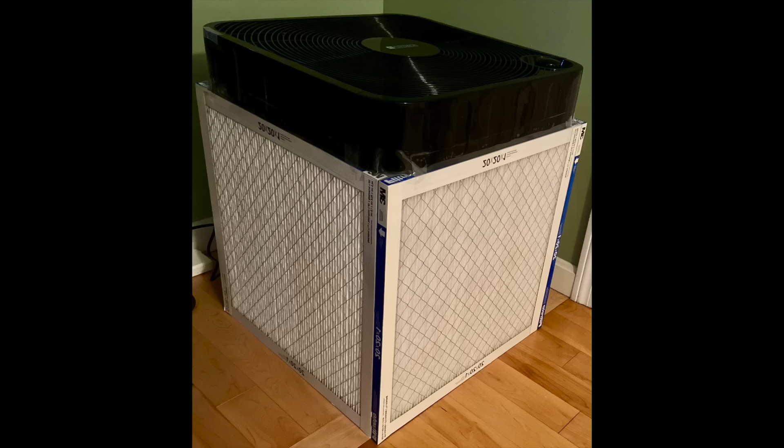First, I'll tell you a story about why I started getting skeptical about the efficacy of most HEPA air purifiers in the first place. One day, an indoor environmental professional, or IEP, came to my house to do a radon test. In my house, there were a couple DIY air purifiers I had built, which were inspired by the Corsi-Rosenthal box, or CR box, design by Jim Rosenthal and Richard Corsi.

CR boxes are typically built from 4 MERV-13 HVAC filters attached to a box fan that sucks air through the filters. The IEP saw one of my CR boxes and said, 'Those are pretty good at capturing larger particles, but they're pretty bad at capturing tiny particles. HEPA air purifiers are way better at capturing tiny particles. You should use a HEPA.'

Let me quickly explain about particle sizes. There are basically a few categories of them. There's PM10, which are 10 microns or fewer in diameter, including larger particles like dust, pollen, etc., and everything smaller. Another category is PM2.5, or fine particulate, which are 2.5 microns or fewer, including some combustion particles, metals, etc., and everything smaller.

PM2.5 is considered dangerous for us health-wise because it can get into our bloodstreams and accumulate in organs, which can cause illness. There is extensive evidence about the health impacts of particulate matter.

Let's talk about one of the many studies. This is epidemiology data from the Harvard 6 Cities study. They measured fine particle concentration in a bunch of different cities and relative mortality rate. As you can see, as fine particle concentration goes up, relative mortality rate goes up as well.

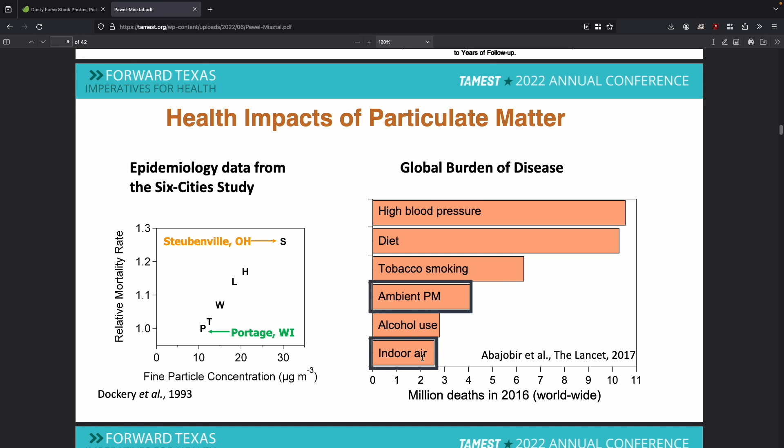In another study published in The Lancet, you can see that poor indoor air quality and ambient particulate matter are among the leading causes of death. This is 2.7 million deaths caused from poor indoor air quality.

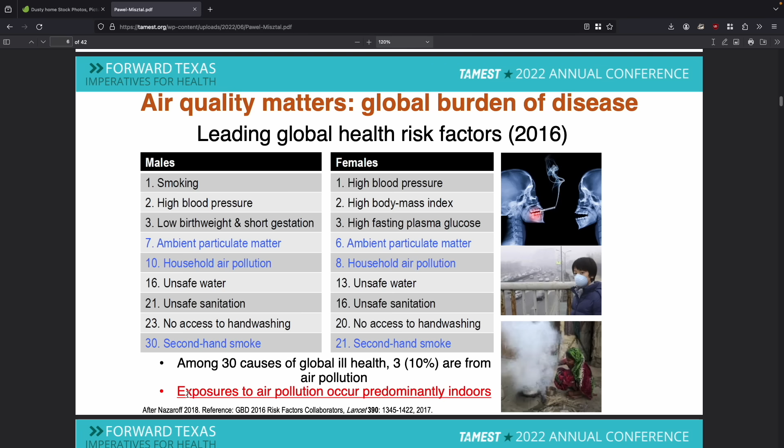Here's another study about the causes of global ill health. You can see that in the top 10 are ambient particulate matter and household air pollution for men and women. And we need to note that exposures to air pollution occur predominantly indoors because we spend 90% of our time indoors. So it's for this reason that my IEP said to get a HEPA air purifier.

I ended up buying 3 units from a brand that was recommended by a few mold inspectors that I follow and trust. I won't say which brand, but it promised incredible efficiency, better than standard HEPA. So I was super excited when my 3 shiny new HEPA units arrived in the mail. I immediately turned them on and shut off my 2 DIY air purifiers.

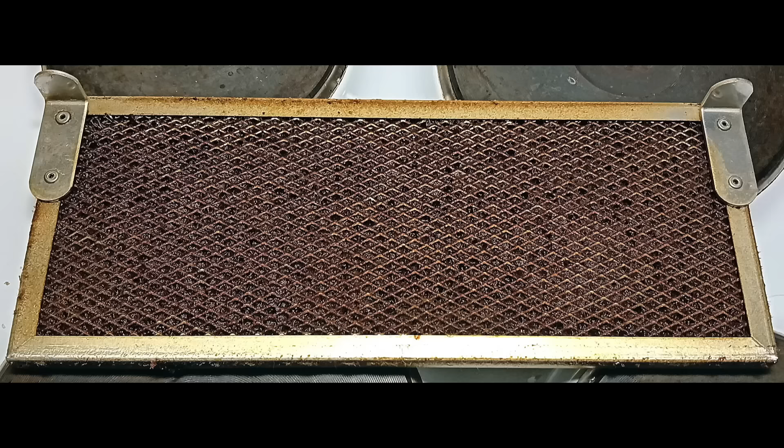Particulate is being continuously introduced into your home's air from various sources, including the outdoors, cooking, mold, our bodies shedding skin cells, us moving around the house and stirring it up, and more. In order to significantly lower the concentration of particulate in your air, the removal rate, or CADR, must be high enough to counteract the generation rate.

Let me put it practically. When your air purifier has a high enough CADR for the space it's in, there's less of a chance that particulate concentration will build to an unhealthy level. If it does, it won't stay there as long—your duration of exposure will be shorter. In determining the performance of an air purifier from an indoor air quality perspective, CADR is the only measurement that matters, because it's a direct reflection of how clean the air will be.

Let's go back to my initial question: how can a HEPA air purifier capture virtually all particles but still leave the air dirty? To answer that, I'll tell you this—extensive research shows that DIY air purifiers, CR boxes basically, using MERV-13 filters tend to achieve much higher CADRs than HEPA air purifiers. To help us understand why, we'll talk to Wayne Westerman and Rob Wissman, co-founders of Clean Air Kits, a company that makes and tests air purifiers that actually work at an affordable price point. Wayne and Rob will introduce the concept of how MERV-13 filters can outperform HEPA in in-room particulate purifiers.

The most important metric is how quickly you're removing the particles from the room. If you look at a MERV-13 filter for viruses, yeah, it's capturing about 75% of the particles per pass. But you've got these two big filters here, you've got an enormous amount of area. If you're building a Corsi-Rosenthal box, it's like four filters—it's an enormous area for that to happen. So the total number of particles you're capturing is going to be really big. Here, this big blue arrow, that's your equivalent of how much air is coming through perfectly clean.

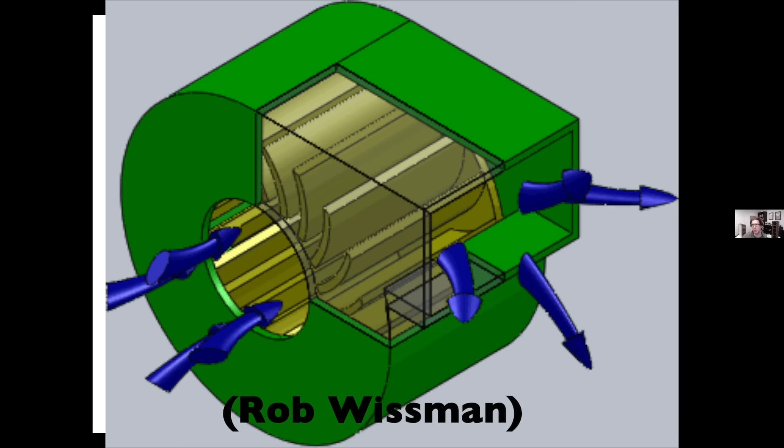Amen. So with HEPA, to get a high CADR, what do you actually need to do? There's two directions they can go. They can put a big honking fan on it that's really powerful and really loud, or they can make a big honking filter, which takes up a lot of room and is going to be really expensive to buy replacements for. That's how they can make it either quieter, or more powerful, or both. And there's some serious trade-offs there in terms of user experience and cost.

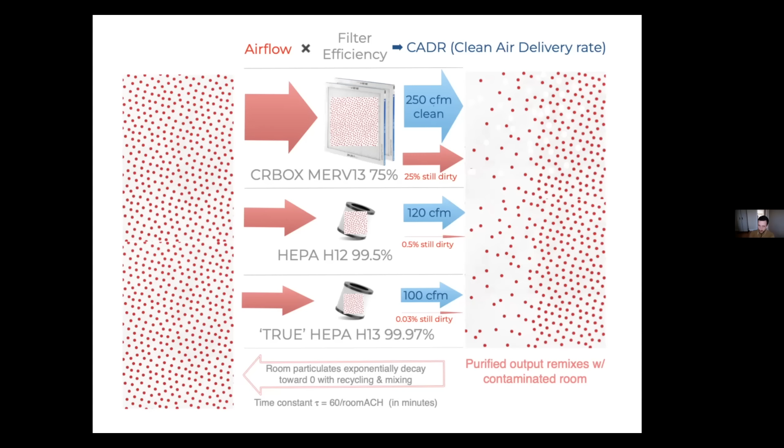Well said. Isn't it true also that many HEPA air purifier brands don't even report CADR in the first place? So when you look at websites for HEPA air cleaners, yes, some of them don't advertise the CADR. And there's probably a reason for that. It's not that they don't know the CADR for that device. So that's just something that consumers should be aware of. I say CADR, Wayne and Rob say CADR.

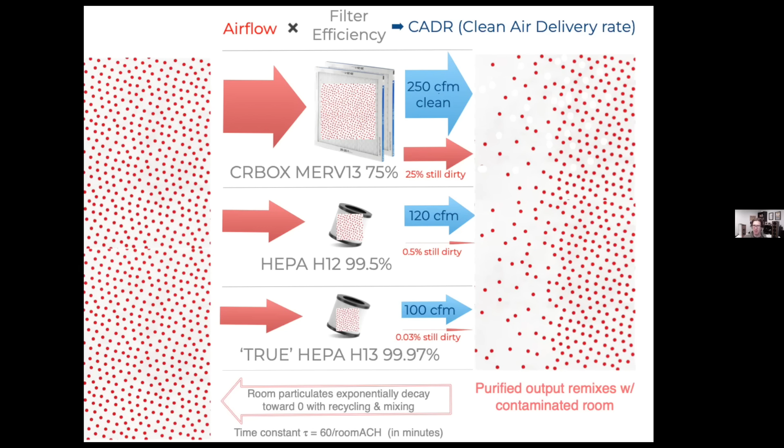We both mean clean air delivery rate. And there are a few HEPA brands that do report CADR. Among those, can we trust that number, or is it a little misleading? A lot of the time, there's a single number reported. And when that's the case, the number is most likely from the highest and loudest setting available on that device, because that gives them the biggest air cleaning number. That's when the fan's moving the fastest.

So what do I do to counteract the influence of deceptive marketing? I go up to my proverbial rooftop and I shout about the research.

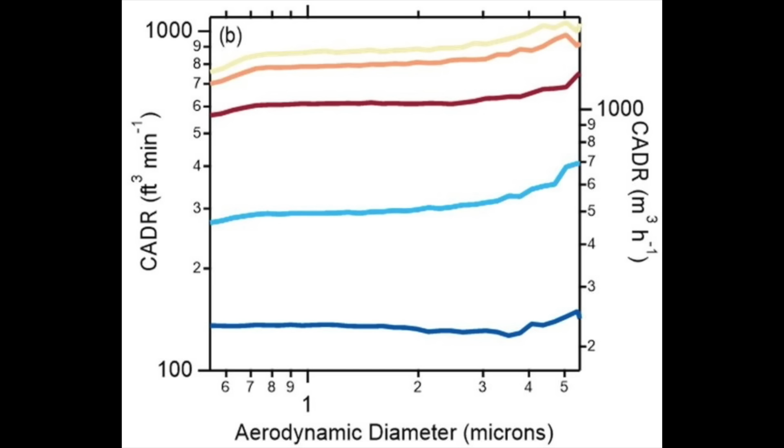Moving on, noise levels of both the CR box and the HEPA were high. That's because the CR box used a box fan. There are quieter fans these researchers could have used—more on that later. Our next study is by Srikrishna et al., who tested a bunch of DIY air purifier configurations against best-in-class HEPA air purifiers. I'm going to focus specifically on their CR box configuration here versus the best HEPA here.

This HEPA on a high speed had a significantly lower CADR than the MERV-13 CR box at its lowest speed. I'm sensing a trend. This was for particles at 0.3 microns, the most penetrating particle size, or MPPS, meaning the size of particle that filters are worst at capturing. So this size is good to use in testing because it tells us the worst case scenario.

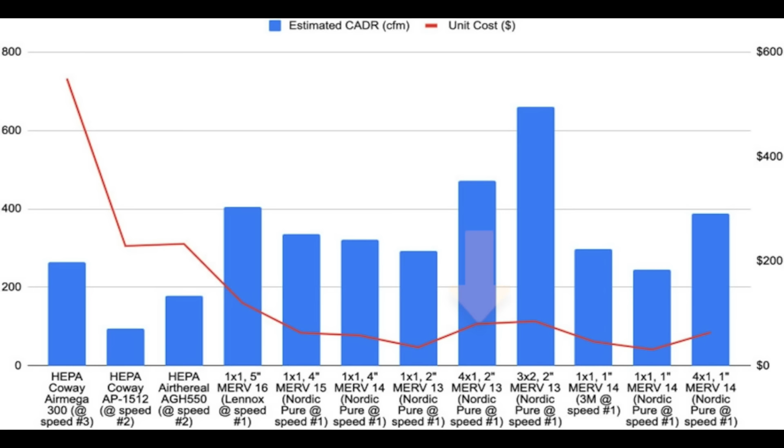The upfront cost of the components of the CR box was around 5 times cheaper than the HEPA. Like this video if you're starting to see why I'm angry.

Before I move on, I want to point out something interesting. The HEPA unit's efficiency actually measured lower than 99.97%, which is the expected efficiency of HEPA. More on that later.

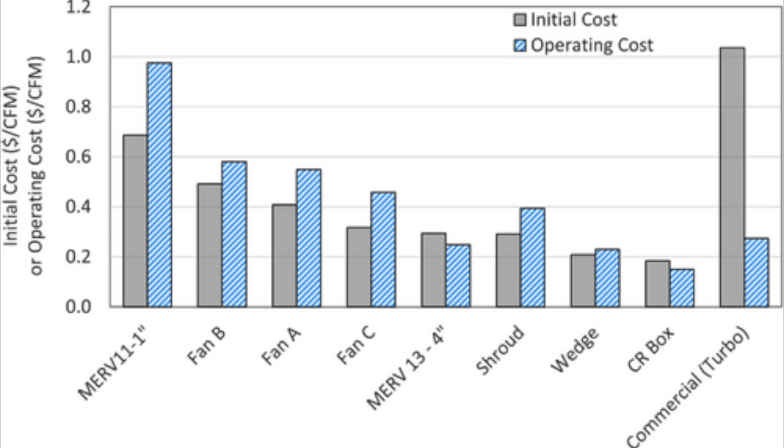This third study by Holder et al. demonstrates that DIY air purifiers can even be effective at capturing wildfire smoke, which mostly measures 0.3 microns. This MERV-13 CR box vastly outperformed a commercial HEPA air purifier in terms of CADR, and also initial cost per CADR and CADR per watt. Interestingly, researchers found that filters saturated with wildfire smoke perform much worse in terms of CADR. So remember to change your filters frequently during wildfire season.

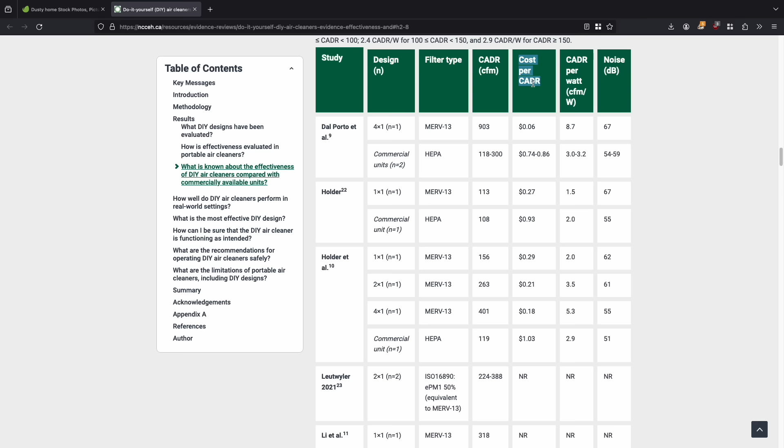Here's an amazing review that compiles a lot of the available data about DIY air purifiers. It's laid out really conveniently so you can see lots of metrics in one place for the studies I just went over and others. Basically, DIY air purifiers consistently beat commercial HEPAs in terms of CADR, cost per CADR, and CADR per watt. So with their great airflow, these DIY CR boxes clean the air faster, cost less upfront, and use less electricity, even though they use MERV-13 filters, which are less efficient than HEPA.

In the studies I just went over, we saw that MERV-13 filters can capture fine particles as small as 0.3 microns. But what about ultrafine particles, which are 0.1 microns or fewer? Let me explain. One argument that people who are brainwashed into touting HEPA air purifiers repeatedly make is that HEPA can capture ultrafine particles while other filters can't.

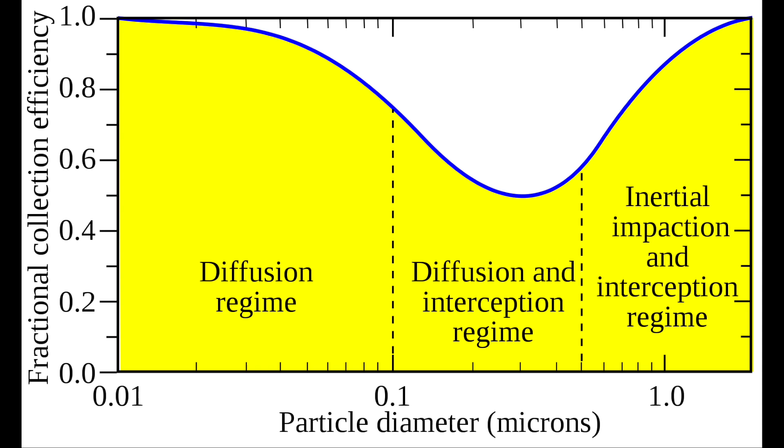It is true that HEPA filters can capture ultrafine particles. In fact, HEPA filters are better at capturing ultrafine particles than they are at capturing slightly larger particles. This goes back to the concept of most penetrating particle size, or MPPS, which is around 0.3 microns. To recap, particles around 0.3 microns are the most difficult for HEPA to capture, and HEPA is better at capturing particles both larger and smaller than 0.3. But the thing they don't tell you is that MERV filters exhibit the same phenomenon.

Figure 5 from Azimi et al. shows the size-resolved removal efficiencies for MERV-rated HVAC filters, so how efficient they are at different particle sizes. On the x-axis, you can see the particle size from 0.001 microns, well into the ultrafine range, to 10 microns, a larger particle. On the y-axis is removal efficiency, so the higher the better. On top, you can see HEPA, which is of course the most efficient of all filters, near 100% no matter the particle size, but being the most efficient at sizes smaller and larger than MPPS, as we went over.

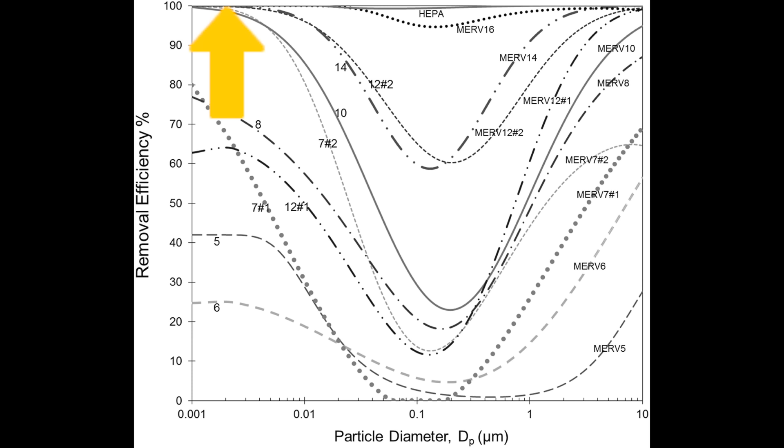But these studies measured single pass efficiency for a standalone HVAC filter. What about in the context of a DIY air purifier with 4 filters?

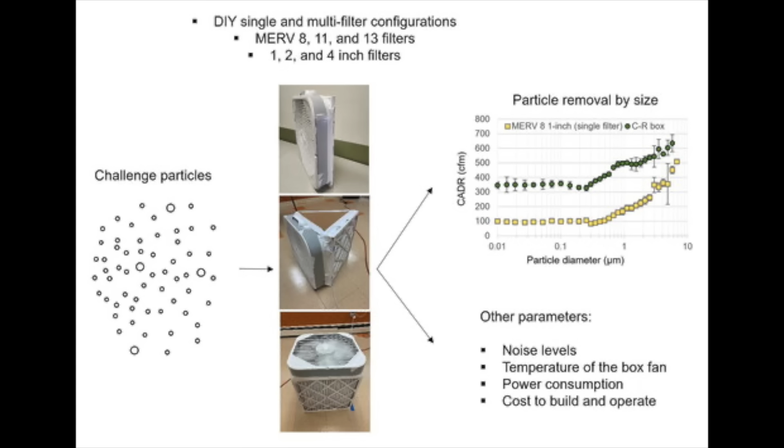Myers et al. demonstrates that CADR of a CR box, in green, is lowest at the MPPS of around 0.3 microns and increases slightly as we get more ultrafine down to 0.01 microns. I'd like to point out that these researchers didn't measure particles as ultrafine as the previous study, and if they had, I'd expect to see CADR increasing more on the left end as particles get more ultrafine. Even so, the data shows that CR boxes can absolutely capture ultrafine particulate, and just like HEPA, they're even better at it.

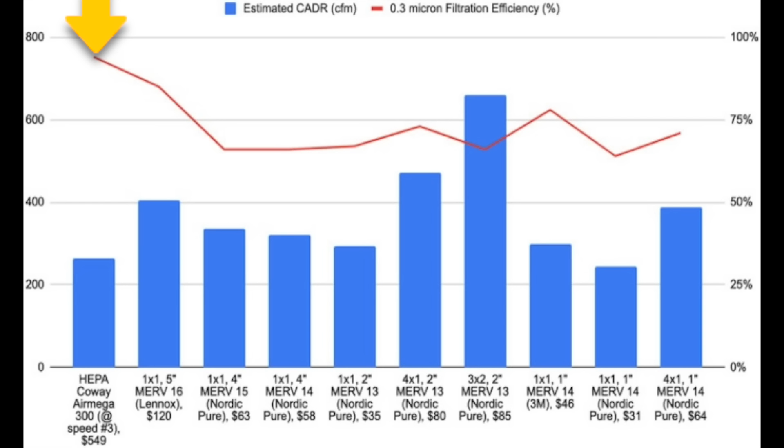Remember earlier when I mentioned that the HEPA air purifier from Srikrishna et al. had an efficiency lower than 99.97%, its expected efficiency? This may be because on turbo speed, the speed used to market their CADRs, most HEPA units are running at a velocity much higher than the velocity used to test their filtration efficiency. In this context, the faster air flows through a filter, aka face velocity, the more particles can penetrate through it without getting captured. We don't want penetration.

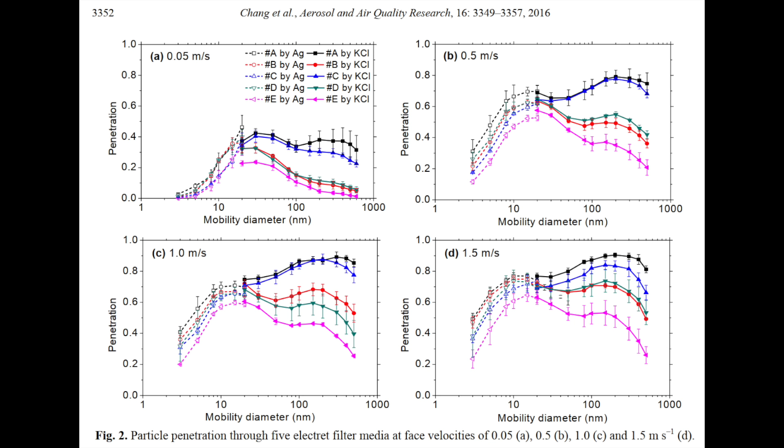This study by Chang et al. shows that penetration decreases as air velocity drops, especially for ultrafine particles, interestingly. So the fact that low velocity lets fewer particles penetrate is good for CR boxes, because generally velocity will be much lower in a CR box than a HEPA unit. This is because CR boxes tend to have a much larger filter surface area. They have 4 filters, that's a lot of area. Also, I especially love this study because it used 3M Filtrete filters, the best HVAC filters right now according to numerous testers, one being the 3D Handyman.

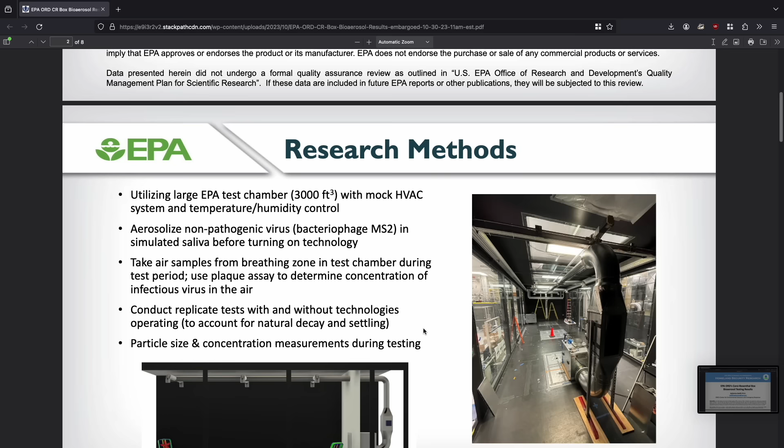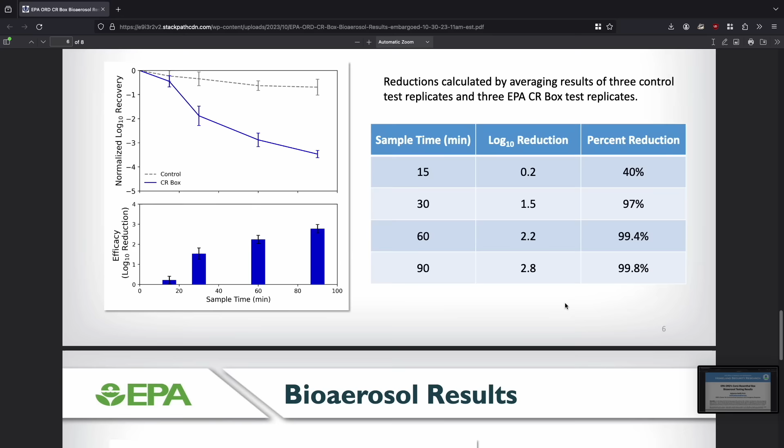So it's pretty clear that CR boxes are amazing. But can they protect us from viruses? This is a presentation by Dr. Katherine Ratliff from the EPA, in which a non-pathogenic virus was aerosolized in simulated saliva in a large 3,000 cubic foot chamber. The results: the MERV-13 CR box drew down 97% of bioaerosols in 30 minutes and 99.4% in 60, far better than control, which was the CR box turned off. CADR was 234 CFM. So yeah, DIY air purifiers can protect us from viruses too.

So now we know that CR boxes leave HEPA air purifiers in the dust in terms of initial cost, energy efficiency, and of course, clean air delivery rate, no matter the particle size. However, both HEPA units and CR boxes can be a bit noisy.

Is there a way we can retain the high CADR of CR boxes but use a quieter fan than a box fan? Remember Wayne and Rob from earlier? They've figured out a way at their company Clean Air Kits. They make a line of air purifiers that are quieter and more energy efficient, even than standard CR boxes, while still retaining some of the design features that make CR boxes so effective in terms of CADR.

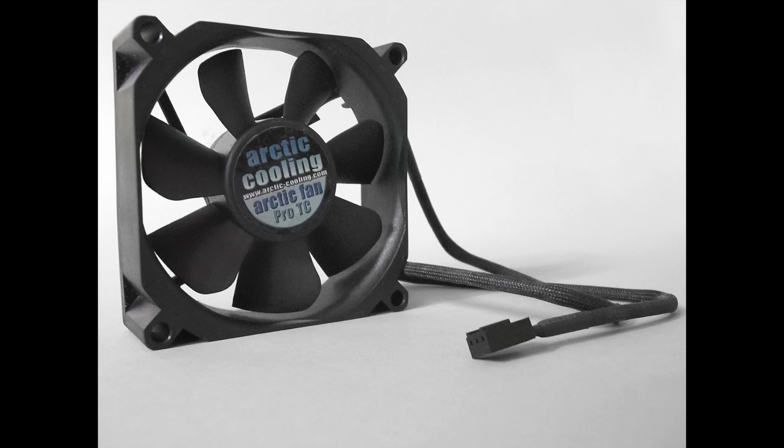The key: PC fans. Can you guys talk about how PC fan CR boxes can save hundreds in electricity and filter replacement costs compared to large HEPAs with equal clean air delivery?

PC fans have been optimized by a very competitive industry for quietness and energy efficiency. And we found that the 120 millimeter size seems to be the most efficient size. Then we went through all the brands to see which was the quietest and most cost effective. On this chart, watts per occupant on this axis and dollars per occupant, we're just kind of off the charts, way more efficient. We're under $20 per occupant. This is assuming continuous operation throughout the year and a filter change every year. And sampling of other HEPAs, it's costing twice as much and often using several times as much power to do the same thing. Amazing. Wow.

So can you talk about your process for selecting the specific PC fans that you ultimately went with? We took even from the dozen leading models of static pressure PC fans, we evaluated all those in terms of noise and the prices they were available at. And we settled on the Cooler Master brand for most of our products. They have these Sickle Flow and Mobius fans, and they are just a couple decibels quieter than their competition at these operating points. And they're really well built too, robust, and they are UL registered. So that allowed us to pursue UL 507 certification, and that's going to help us get into classrooms and commercial settings.

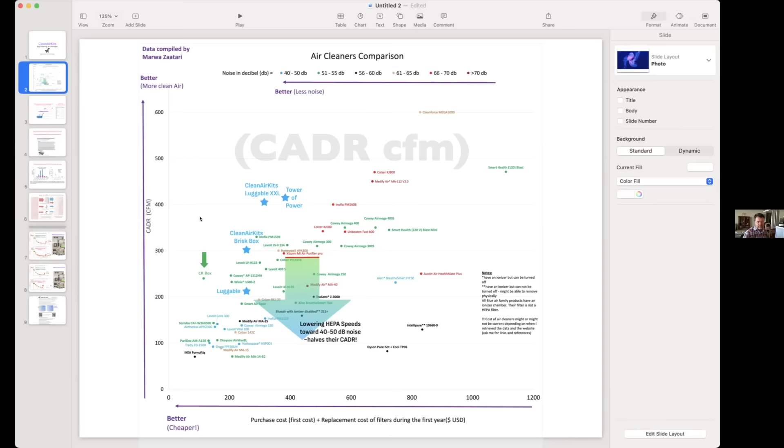This is a sample CR box. They can be anywhere from 250 to 400 CFM by some measurements on their low and medium speed. If you turn the box fan up to high, it would be up here at 600 or 800 CFM. Really, really good, except on high, they're really, really loud too.

This chart was originally put together early in the pandemic, like 2021, and it's got all these HEPA brands. You want to be up in this corner as far as you can on the chart, because you're getting high CADR and low cost. You can see we're kind of leading the march toward that corner compared to all the HEPAs.

The remarkable thing is we're doing it while being quieter than all of them. If you took all these HEPAs in red and green and turned down their speed till they were in the blue range of 40, 50 decibels, then measured them, they're going to drop in half in their CADR performance. They're all going to be clustered way down here.

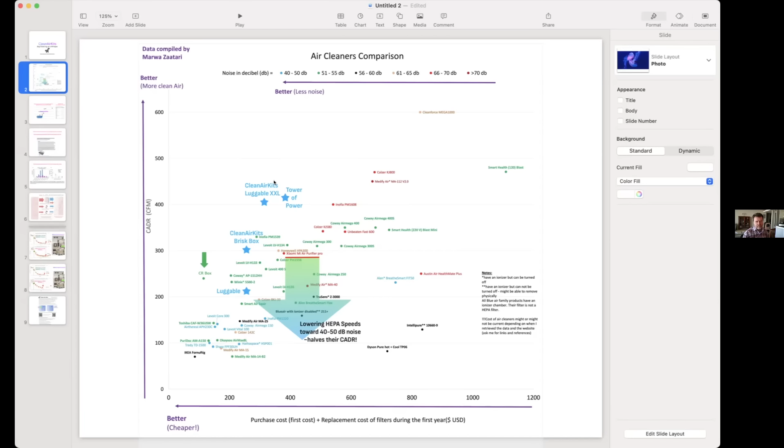In short, we can match the CADR of a CR box on low-medium with our range of models using 5 to 9 or 10 PC fans. We're going to use like 1/5 the energy of the CR box, and we're going to be at least 10 decibels quieter.

One convenient feature about Clean Air Kits that I wanted to mention is that when the power goes off and then goes back on again, Clean Air Kits are so simple that they'll automatically turn back on when the power goes back on. Next, Wayne from Clean Air Kits is going to talk about a deeply informative experiment where he compared the Luggable XXL from Clean Air Kits to a HEPA unit for viral-sized particles.

This was a well-rated, well-regarded, popular commercial HEPA unit. Both the Luggable XXL and the HEPA unit have CADRs of 400 CFM, so they have the same CADR. So how do other aspects of their performance compare?

Wayne: They're both doing what they said. They're doing 400 CADR. They're bringing the particles down. Overall, it's the same. But the PC fans are doing this with about 46, 47 decibels of noise through their MERV-13 filters and using 15 watts of electricity.

The HEPAs on turbo, 64 decibels, almost 20 decibels louder. On turbo, it sounds like a little mini jet engine next to you. And 49 watts, 3 times as much power to do this.

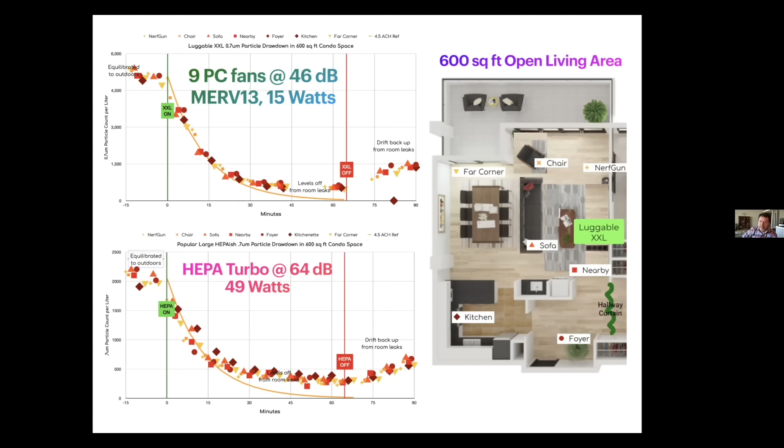So this is a practical example. Our rule of thumb is if you're buying a HEPA and it has a CADR rating, chances are in practice you're going to get half the CADR out of that by the time you turn it down to medium, where it's below 50 decibels and tolerable.

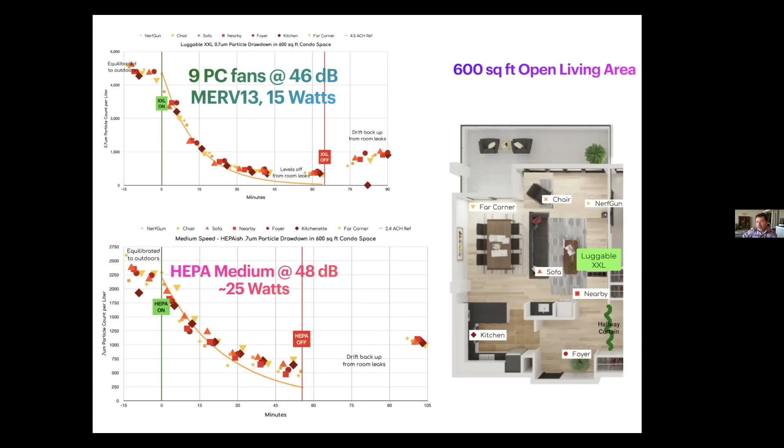So we show that in this chart. We turned that HEPA down to half, and its rate of drawdown fell in half. Instead of getting 4.5 ACH, it was now getting only 2.4 ACH. So to get it back up to 400 CADR or CFM, you have to buy 2 of them and run them on medium.

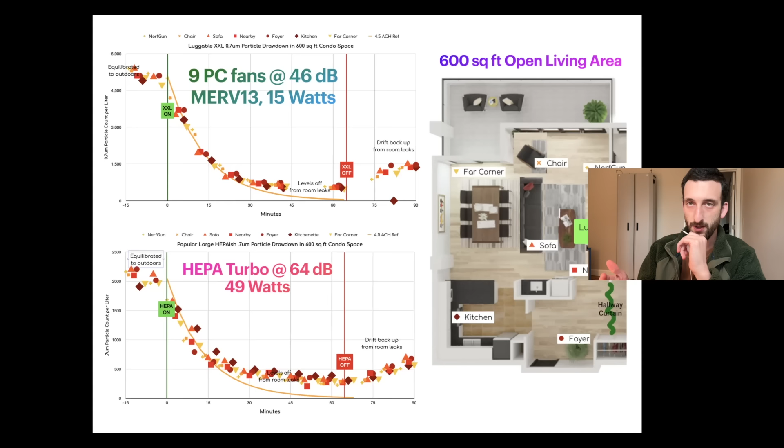I'm going to point out an unexpected finding here. The Luggable's drawdown was much cleaner than the HEPA unit's, indicating that the Luggable, with its PC fans facing different directions, more effectively dispersed clean air throughout the space.

So that leads us to the ultimate question: which air purifier should you get? Well, you have 3 options. Option 1, you can buy from Clean Air Kits.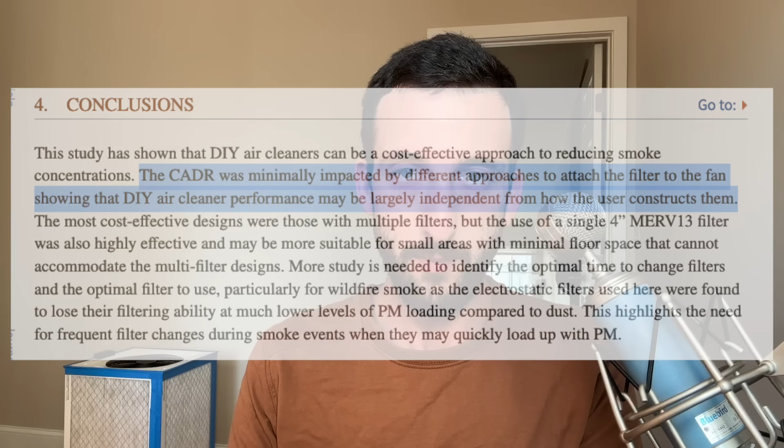Still, I don't want to be a hypocrite. I do plan on testing its CADR at some point, and until I do, take my words with a grain of salt, or should I say, a grain of particulate.

Before you get an air purifier, please keep this in mind. Make sure its CADR is high enough for the particular space you'll be putting it in. There are a few ways to do this, but the easiest and quickest is AHAM's 2/3 rule, which states that the CADR of your air cleaner should be equal to at least 2/3 of the room's area. For example, a room with dimensions of 12 feet by 15 feet has an area of 180 square feet, 12 times 15. So use an air cleaner with a CADR of at least 120 CFM, that's 180 times 0.66, or 2/3. For wildfire smoke though, CADR should be equal to the size of the room in square feet, so 180 CFM in this case.

Another great sizing method is ASHRAE 241 if you're concerned about infectious aerosols. In the interest of conciseness, I won't go over that in this video.

Now I'm going to give my opinion on sizing for homes. I actually prefer CADR to be closer to twice the room area because I'm environmentally sensitive. You can use multiple air purifiers to achieve this. For example, in my open kitchen/living room space, which is around 500 square feet, I have 3 Brisk boxes from Clean Air Kits, each with a CADR of 300 CFM. So 300 times 3 equals a total of 900 CFM. 900 is almost twice the room area of 500. That's what you want to shoot for.

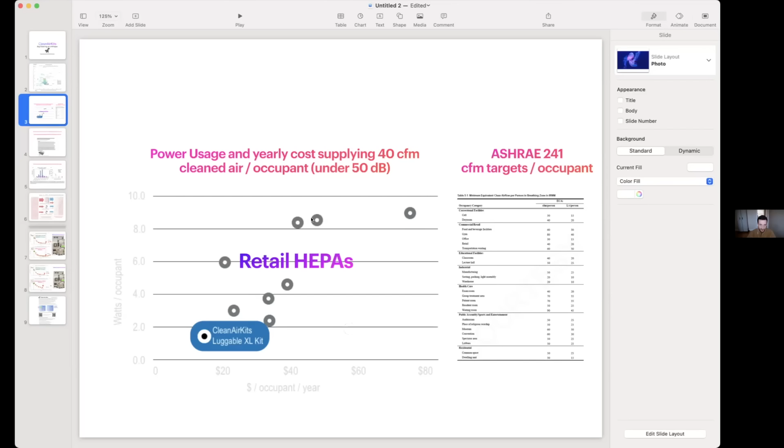So you guys have an air cleaner called the EXHALARON that does something especially unique that I don't think most people are even aware air purifiers can do. Can you talk about it?

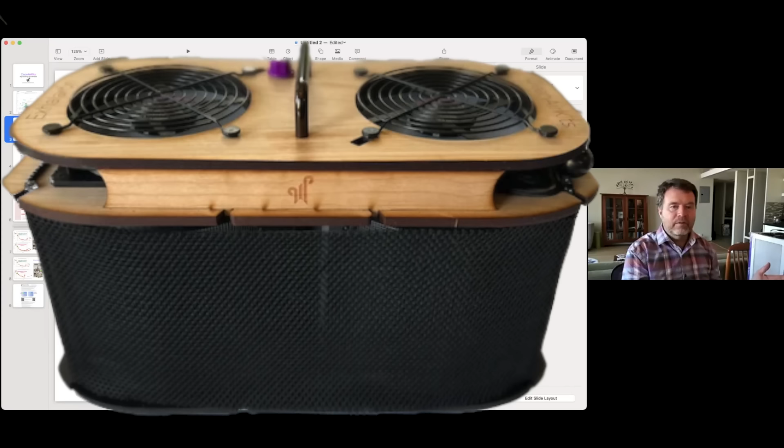What it's going to do is basically create so much suction that the people surrounding it, 3/4 of their breath is just going to go through and instantly get filtered before it even spreads into the room. So this is near field source control of about the level of a cloth or surgical mask that most people wore in the pandemic. Not as safe as if they were wearing an N95, but it's still a 2 to 4x jump in safety instantly for everybody in the room, and it's so quiet it doesn't bother anybody. I can work with this thing. I can have a meeting with this thing right next to me, and I can put it on my nightstand. There's no other HEPA on the market that's quiet enough to do this. It's another 3 to 4x margin of safety over just the overall room air cleaning.

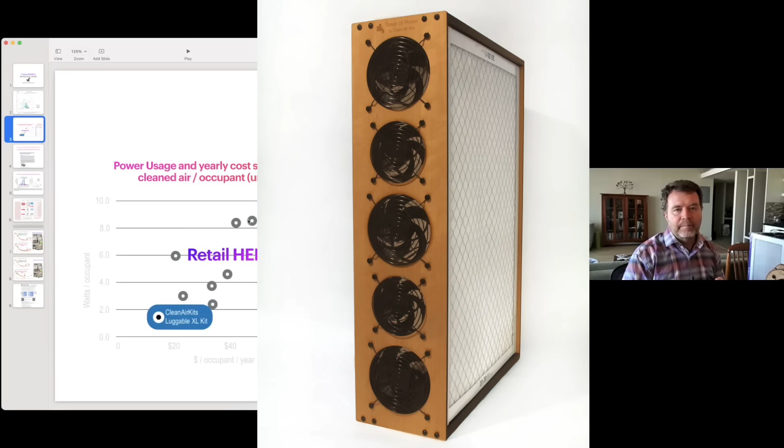In bigger rooms like your dining room, open areas will have either a Luggable XL, a Tower of Power, or an end table with 7 to 10 Sickle Flow fans covering large spaces of 500 to 1,000 square feet. Then put Exhalarons on the nightstands in each bedroom. It's big enough to do about 5 ACH in the room as a purifier, especially on both nightstands—it pulls your breath as you're sleeping, cleans it, and pulls it away from your partner sleeping next to you.

We did a cool video of this with a fog machine. When we have guests over for dinner, and sometimes even breakfast for ourselves, we'll put an Exhalaron on the dinner table. The sharing of breath across the table when you have one of these present is greatly reduced.

Now I'm going to preemptively address a couple questions I suspect you'll ask. Question 1: are there situations where the high single-pass efficiency of HEPA filters is actually useful? Absolutely—if one space is dustier and another is cleaner, HEPAs help keep dust out of the cleaner space. For example, in HEPA vacuums, HEPA filters are crucial to keep particles from the dusty floor from being dispersed into the air.

Question 2: many commercial air purifiers have activated carbon filters, while CR Box and PC fan air purifiers generally don't. Is this a big loss, and is activated carbon as useful as people think in this context?

Joey Fox has an amazing answer for this in his article called 'How to Pick an Air Cleaner,' linked in the description. Carbon filters can remove VOCs, ozone, and odors. They can potentially be effective if sized properly.

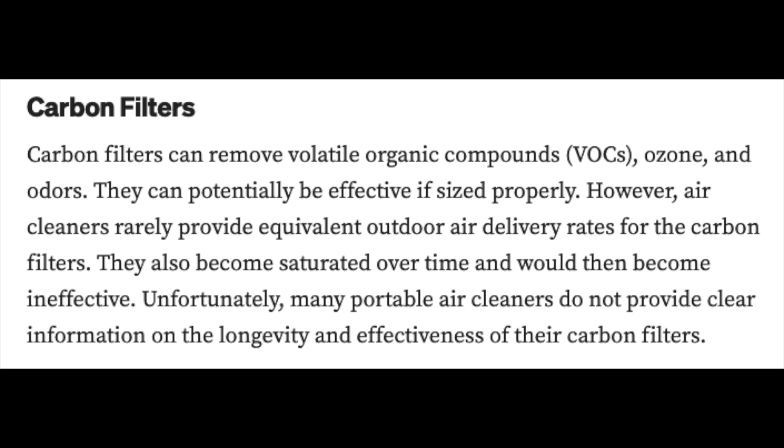However, air cleaners rarely provide equivalent outdoor air delivery rates for the carbon filters. They also become saturated over time and would then become ineffective. Unfortunately, many portable air cleaners do not provide clear information on the longevity and effectiveness of their carbon filters.

While carbon filters are a harmless feature, they may not necessarily deliver the desired results. Additionally, carbon filters do not remove particulate matter, which includes airborne diseases. Therefore, they have no impact on addressing health concerns related to viruses or other particulate matter.

In general, when dealing with VOCs and odors, the most effective approach is through ventilation by supplying fresh outdoor air to the space. Considering the uncertainty surrounding the effectiveness of carbon filters, they are not something that should generally be pursued, but that shouldn't deter you from purchasing the air purifier altogether.

In that same article, Joey also talks about why prefilters and other features may not be necessary. Hint: they're trying to take your money.

So yeah, when it comes to air purifiers, there's a lot of really bad advice out there. I've gotten bad advice even from people that I trust. Let's never again let anyone manipulate us into getting locked into a proprietary system that profits from us buying needlessly expensive filters.

And replacing them too soon, sacrificing our health for their bottom line. This is why I call you guys my fellow renegades on this channel—let's be renegades. Let's divorce ourselves from these broken systems that manipulate us and profit off of us.

The reason why I'm so angry is because us having the right air purifiers is literally a matter of life and death, as these studies and many others show.

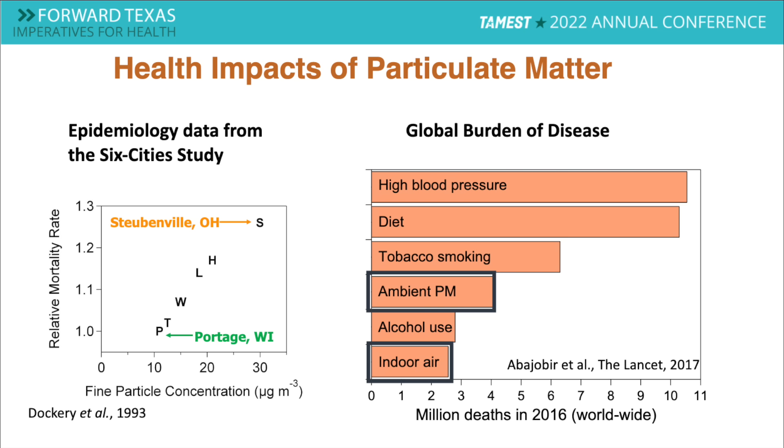In the figure on the left, the higher the particulate concentration in a given city, the higher its mortality rate. On the right, ambient PM and poor indoor air quality are now among the most common causes of death, right up there with high blood pressure, poor diet, smoking, and alcohol use.

Through the years, I've bought numerous brands of overpriced and ineffective HEPA units. Now that I know about clean air delivery rate, my days of being scammed are over.